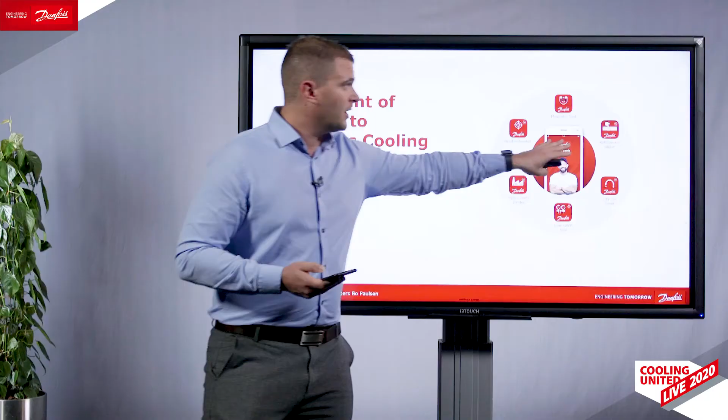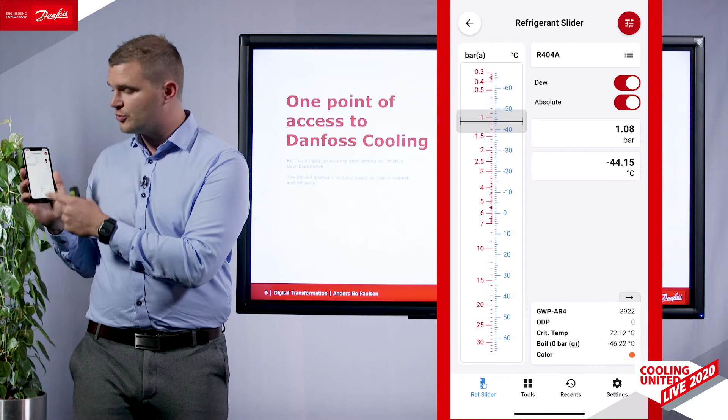We took the refrigerant slider and built on top of that. So for those who wonder why you can no longer find the refrigerant slider, it's because it has evolved into RefTools, the app I have open on my phone right now. In the bottom section you can see other menu sections: tools, recent, settings. The tools I'd like to introduce you to today are the ones we've added to this journey. Refrigerant slider is the main startup, and when you click tools in the bottom section, you're presented with multiple tools inside it.

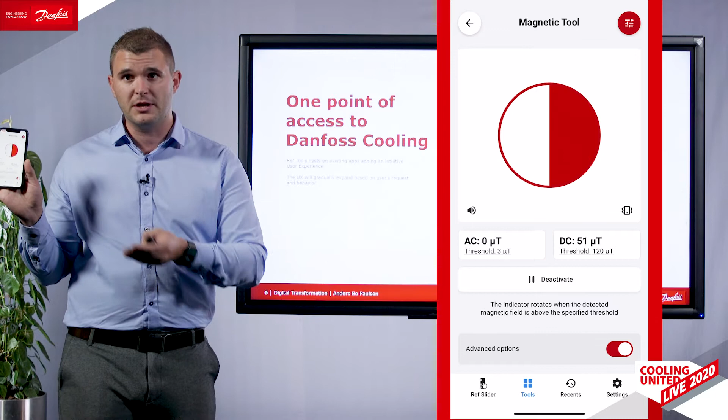Let's take the first one, the magnetic tool. This is one of the recently added tools. Based on the key hangers we gave out to installers over time, which have a little compass that spins when placed near an element with magnetism, the magnetic tool does the same thing. If you have a magnetometer in your phone, and all new phones have that today, and you put it to a solenoid coil, if the coil is turned on it will start to spin. If it's not turned on or it's broken, it will not spin. Right now on my phone it's not detecting any magnetism, so it's standing still. The tool is made so that if you're somewhere you can't see the screen, the phone will vibrate and beep if it detects magnetism. It's an easy little handy tool that helps you identify if a solenoid coil is working or not.

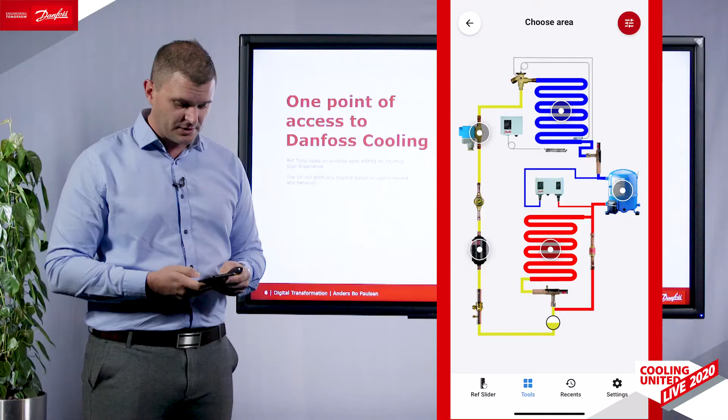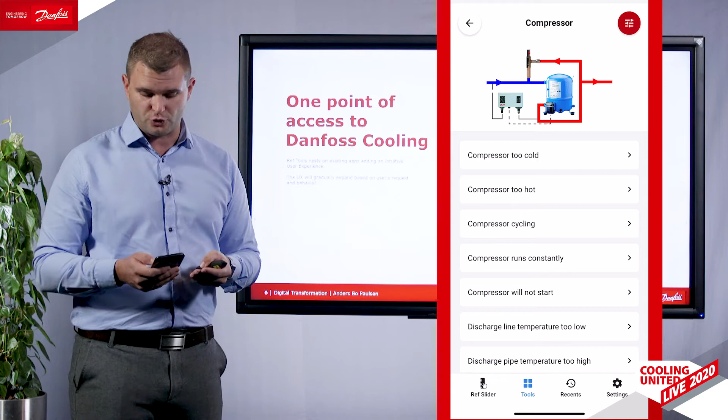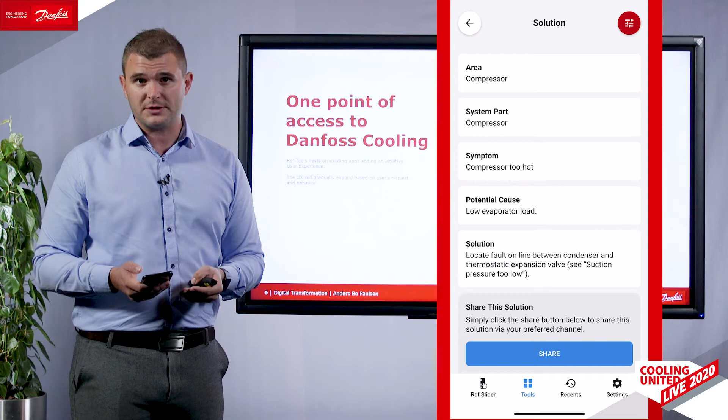Next is the troubleshooter, another tool we've had for many years. It was a standalone app which we've now included into RefTools. It's a simple overview of a cooling application. If we take compressors for example, you can go into compressors and see the product area that belongs to them, then see relevant symptoms, remedies, and in the end, a solution. So if the compressor is running too hot, there are multiple possible reasons, one of them being low evaporator load. If you click that, you can see a possible solution, and if that didn't help, you can toggle back and try another one. It's like a guided, facilitated troubleshooting guide that has existed for a long time as a standalone app, now added into RefTools as you were used to before. We've added more and more content over time to the troubleshooter, and we'll keep doing that going forward, so you'll find more and more troubleshooting material.

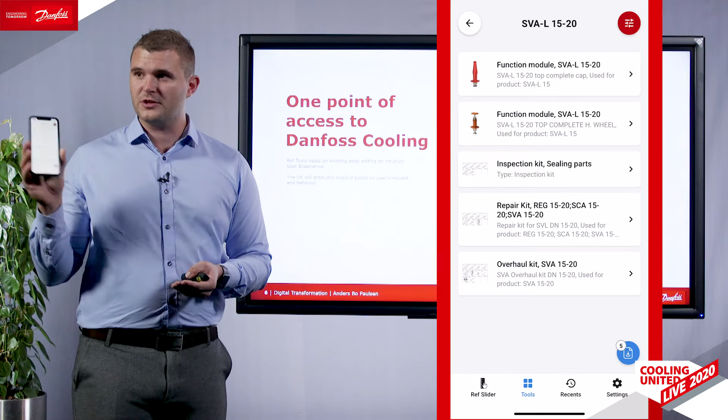Next up is the spare part finder. It started as an industrial refrigeration spare part finder. What it does is present you with menu navigation to find a product. Over the last few months we've been adding more and more cooling products into it, so today it's not just an IR-specific spare part app, but a cooling-specific app. Over the next few weeks we'll add more than 50,000 spare part relations to it, so you should be able to find almost every cooling spare part that exists inside this one. How it works: you click a product type. I'm standing in front of a valve, specifically a stop and shut-off valve, and I can see it's an SVA-L. I pick the relevant size, and you're presented with a list of relevant spare parts. You pick the one you need, and you're presented with an image confirming yes, this is the piece I'm standing in front of. Of course, if it's an internal piece, you need to open up the product to confirm it's that package or part.

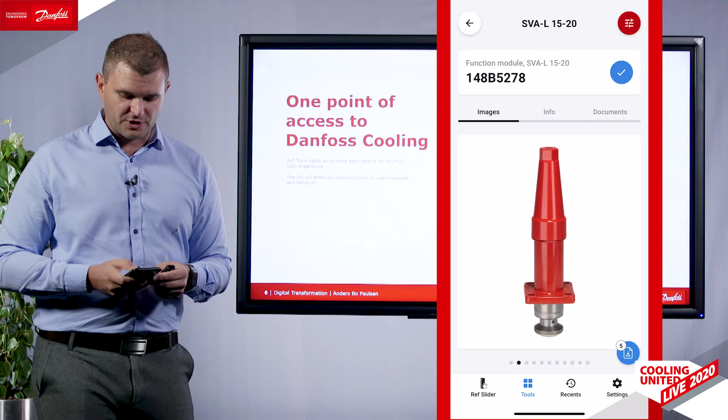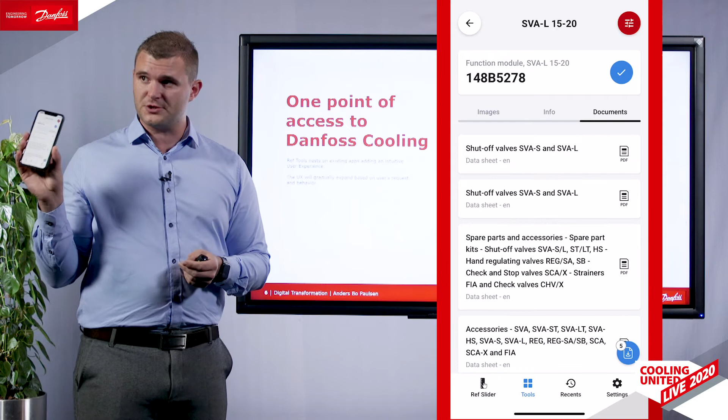You are also presented with product information, so you can see if it's the right size or if it works within the conditions. You can sanity check if you've found the right spare part for this. And you can see all the relevant documentation: data sheets, installation guides, etc.

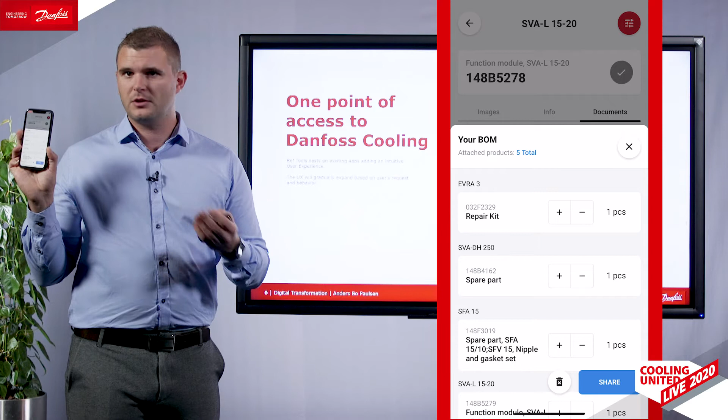So if you confirm that this is the spare part you need, you can add it to your basket. In this basket, you can save all of your identified spare parts and share that with your back office or wholesalers, so you can easily buy it afterwards.

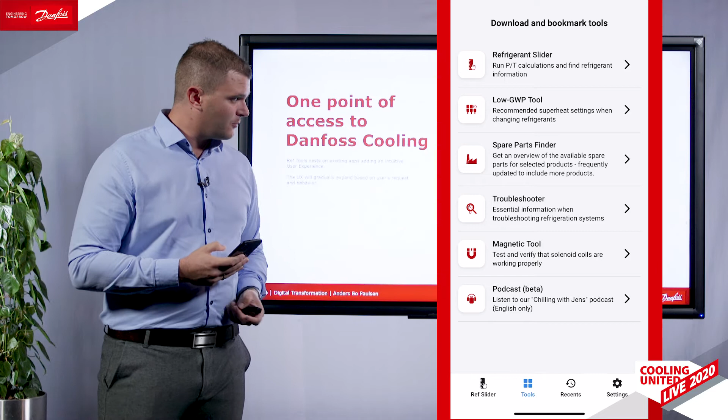Next is the low GWP tool. This tool helps you go from one refrigerant to another, indicating how you should adapt your system, such as how many turns to change your superheat tuning on your TXV. Here you've selected a T2 valve that runs on R404A refrigerant today, and you want to change to R407A.

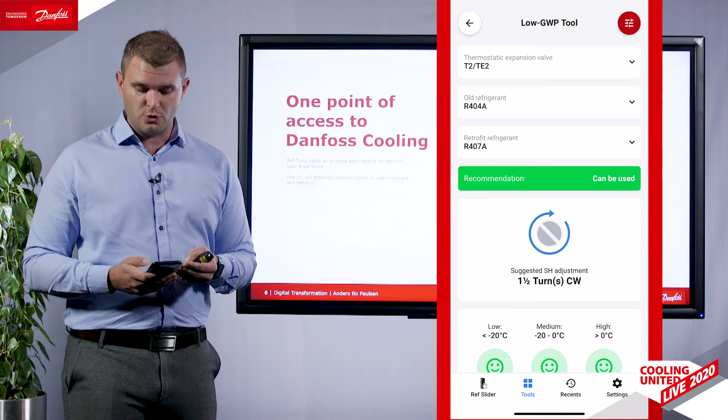The tool gives you a recommendation. It validates it by showing a green sticker, telling you to turn it 1.5 turns clockwise so the system runs efficiently with the new refrigerant. Of course, if you chose an incompatible refrigerant, it would say no-go because you could not superheat tune the system accordingly.

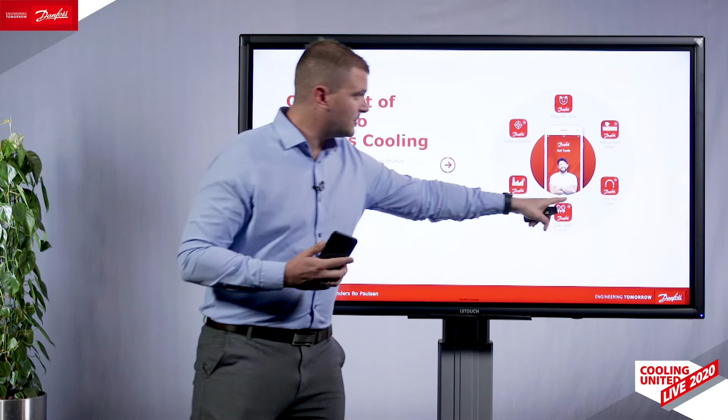Last but not least, we have the TXV Superheat Tuner, a specific tool mainly made for superheat tuning a system. It's not part of Ref Tools today because we're working on version 2 of the existing tool. This version is expected to go live in Q4, and once it's been tested on customer audiences, we will include it into Ref Tools if it succeeds in the test. So Q4 is when you'll see the Superheat Tuner, if all goes well.

But this was the troubleshooting journey. As you may have noticed while we talked through these tools, the troubleshooter and spare part finder typically end with a product, and then the journey stops there. We want to help you even further, so we want to add something called a product finder.

So if the troubleshooter tells you that you need to find a compressor or product XYZ and replace it, the product finder will now help you find that product. Or if the spare part app presents you with the spare part you need, you can find additional information.

The product finder tool lets you find a code number by search or navigation, and then we present a 360 picture around that product. Danfoss has a product store with all product information available for every code number open for sale. We're mimicking that experience onto your phone, so in the field you have this experience at your fingertips.